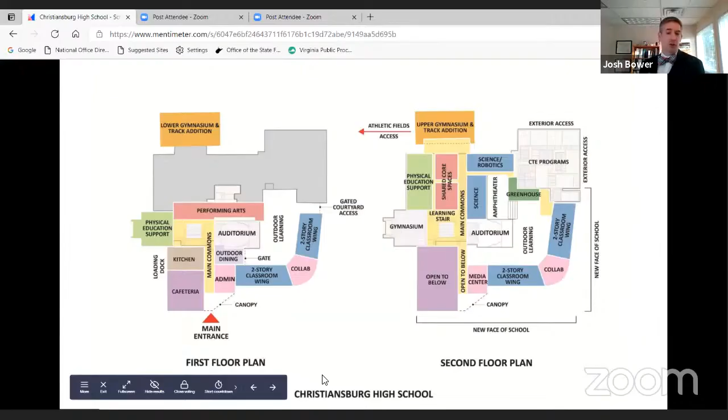After this, we're going to take this diagram - we're working with Mr. Deibler and his team to develop the educational specs of the program, which starts to identify the number of classrooms, the size of the administration. What we could do then is take this diagram and really start to develop an actual floor plan and say, here's what the classrooms are, is there a double loaded corridor, do they have two corridors down, and what does that collaborative area look like? Is that going to be a learning stair? How do we identify that?

So let's go through this diagram. This is the first floor, and we're going to have the main entrance - Independence Way is right here, running horizontally across the plan. We would have a bus or car drop off at this location. So we're looking at the main entrance, and what we're trying to do is identify where the main entrance is a secure entrance. That may or may not be where the students enter, depending on how the site continues to develop, but this could be the spot where we have both car and bus drop off, and all the students enter into a main commons, which would be your front door.

When we're looking at safety and security, this would also be where visitors would enter to come into a secure vestibule and be able to enter into the administration, creating a secure locked vestibule, so that way parents and visitors can only get through as permitted.

So as we look at the main commons, which becomes our main street, off to our left-hand side would be the cafeteria or dining room, along with the kitchen and food court. We have the administrative suite on our right-hand side. We're looking at a 2-story classroom wing, which comes over in a knuckle with the collaborative area, and then connects into the CTE area.

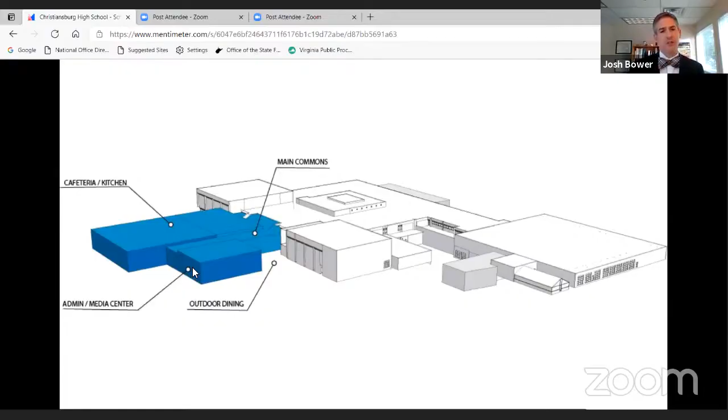And as we continue on for that build, now you can see the two-story classroom wing, that collaborative lab area, which we could do small and large group. We can have that learning stair, could be developed in this section. The two-story classroom wing, that greenhouse.

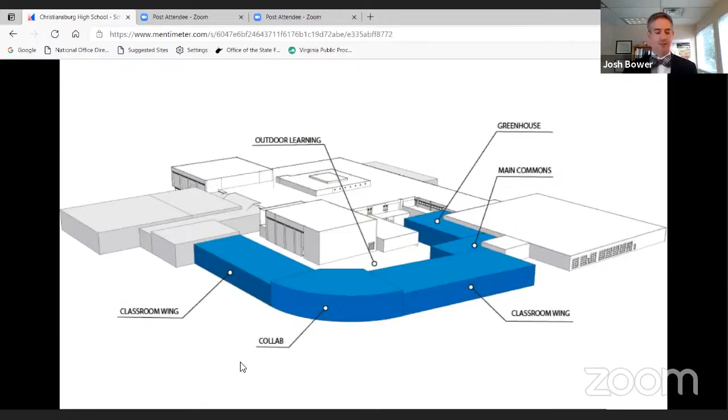What you can start to see here is that with the additions that we're developing, this really does allow us to give the entire building a new face and a new identity in the community. And really kind of bring the level up to enhance it to have the same quality that you have in some of your other high schools with daylighting and space. And then that field house and main commons, which is on the back side of the building, which has a great connection and gives an opportunity for the exterior and interior athletics.

So let's look at it on the site. When we're looking at the site, we have North Franklin and we have Independence. We have opportunities for that bus loop and the parking area, your car drop off with parking.

You can see the opportunities for us to create that new front entrance with your cafeteria, your administration, the classroom wing, the collaboration spaces for all the classrooms, that two-story classroom wing, starting to look at this as a campus, and having that connection to the cadet building.

We're intentionally stopping the parking and looking at, is this a pergola? Is this a raised elevation for a sidewalk to be able to connect it? Does this rotate a little bit more and we have a direct connection from the cadet building into your collaborative spaces? This will continue to look at opportunities to enhance this, but this is a great connection and a great opportunity to promote this building and make it more of a campus.

Parking here that we can start to give that better public access to the CTE programs, additional parking for the field house, for whether that's buses in the rear, or parking for the public, to have for those regional events that you may want to have, with that 200-meter track.

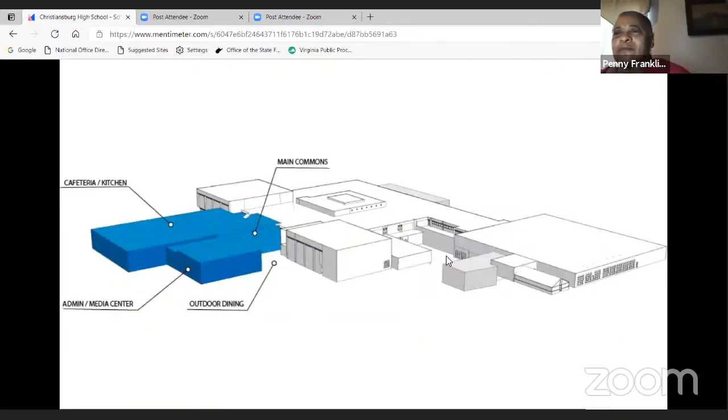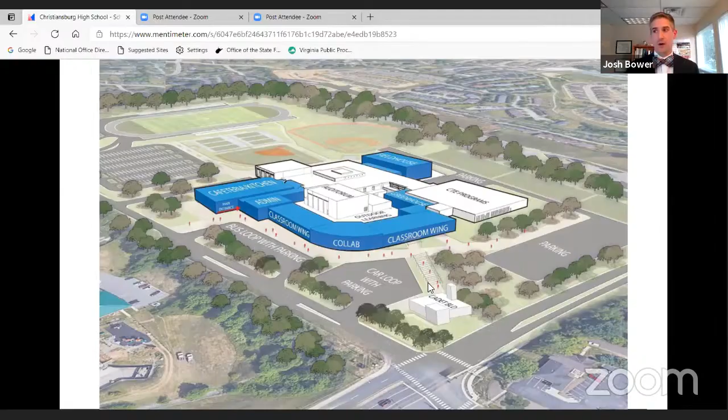Okay, so what probably the majority of folks in Montgomery County do not understand is that Christiansburg High School was built on the site, part of the site of Christiansburg Institute. And we have an opportunity with this expansion to make sure that we are truly integrating that history into what's happening with this building, and especially Friends Elementary School. Because the history is part of the history of Montgomery County, and basically it's just been covered up with other stuff. And that history needs to be uncovered through this process.

I believe everybody agrees with that statement. As this building starts to become more part of the campus and more integral, we're looking at opportunities of what program space could be utilized in this building, and then how can we make this connection stronger between the main high school building and that Friends Elementary School building. So again, this is all part of the process, and one of our goals is absolutely to enhance that connection and make it more part of the campus.

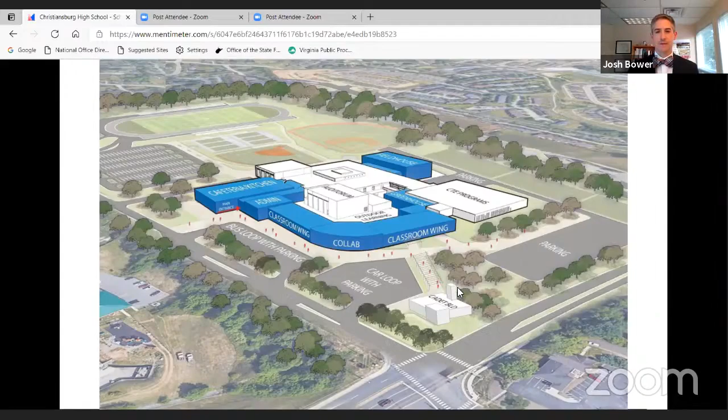Okay. Any other comments or questions, concerns? I had one more. Oh, sorry. Go ahead, Mark. So Josh, one other quick question.

Can you talk a little bit about, often the library media center becomes a central hub to a school. And in this case, it definitely seems, at least from the front, the cafeteria and entrance is going to kind of be a big gathering place and hub. But can you talk about maybe the existing library media center, and then where you envision that either moving to or converting into? Just a little bit more about the library and media center, because I didn't see it in this.

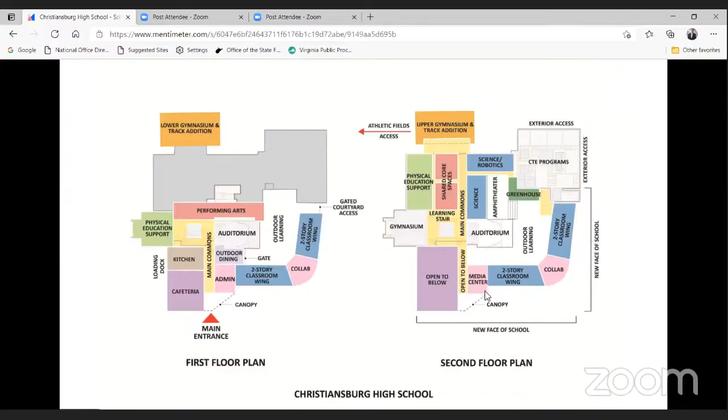Yeah, it's actually on the second floor. So what we'd look to do is actually take an opportunity to put it above the administration area. The media centers are changing over time, moving from a library to a media center. More technology is being involved, more small group meeting space. We've had instances where we've put coffee bars in the media center as opposed to the main commons. With the media center being located above the admin, it would be an opportunity for it to be viewed from the main commons up into that space. This wall could be a glass wall, and we can also have daylighting coming from the outside. There's a direct connection to that 2-story classroom wing, and there would be some type of corridor that's going to go around it.

It's right now, so this is kind of identified as possibly the better location. Also being off of the main commons, it's easily accessible to go from that main commons up to the upper level to gain access to that. At this point, I can't say much more because we're still working on the program for it. But as of right now, we're looking to put it right here, just above the admin, with a connection to the main commons.

So I have another one. Many years ago we were making sure our buildings were community friendly and the community would have access. I can see the amphitheater, those areas, although we want to keep them very safe and for our students to be able to access them, but also for our community to be able to access them.

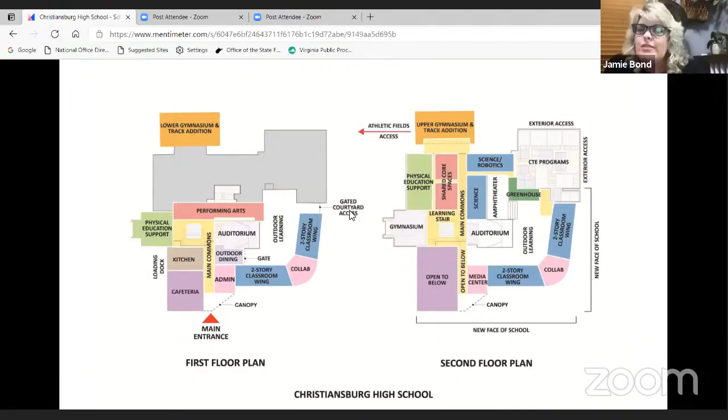That's a great point. What's really nice about electronic hardware is you have the ability to have it unlocked for a certain period of time. So we could have these doors, and you're right, we can absolutely provide access if the school or division desires, through the gate to the outdoor learning areas. For the auditorium, we have the ability to control how those doors are locked and unlocked. The main commons area, this whole section, would have public access, so the public coming through those main doors would only access that main commons area, where the auditorium, field house, gymnasium, and cafeteria are. With electronic hardware we can say from 7 to 9 p.m. those doors are unlocked, and it would just be these doors. So if you had a play and wanted people to have easy access, typically we'd see a ticket booth or somebody at the front door collecting tickets and making sure random people weren't just walking in off the streets. But that's all stuff we'll work through as we develop the design, how public access works, what's the most appropriate times, whether it's best to have one point of access or multiple. Those are things we'll go through as we move into schematic design and through the design phases, to make sure it's safe, secure, and accessible for the public, and friendly for the community.